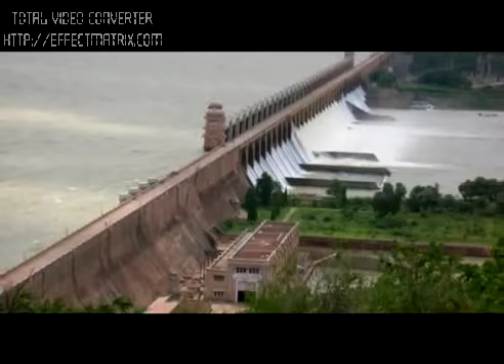Water is a vital element that sustains life on this planet Earth. Our ancestors developed reservoirs to store vast amounts of water to support civilization. The structures erected for the purpose are called dams. Over the years, the size and shapes of dams have undergone tremendous dimensions, and their purpose diversified significantly, so as to include power generation. But are we asking too much of nature, and making the most beneficial discovery of all times, the most potent water bombs?

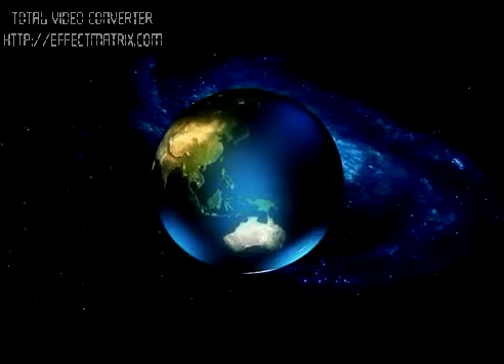The mighty Western Ghats guarding Kerala, the southernmost state of the Indian peninsula. It is the womb of 44 rivers, including Periyar, the longest river of Kerala. It is across this river, the over 100-years-old ailing Mullaperiyar Dam is haplessly awaiting its inevitable destiny. An imminent deluge which may spell the doom of an estimated 2.5 million inhabitants downstream.

And what is more alarming is that its days are numbered, and the nightmare may turn to a reality at any time. Not only the local population downstream, but a host of cities and townships, along with all their progress, are in peril in the event the inevitable happens.

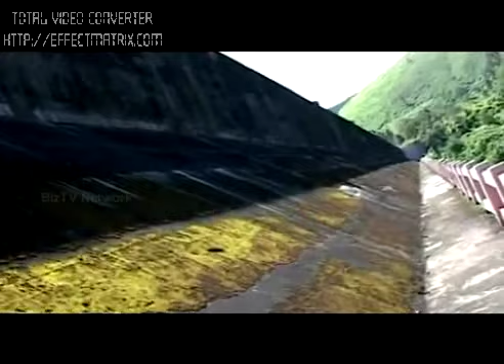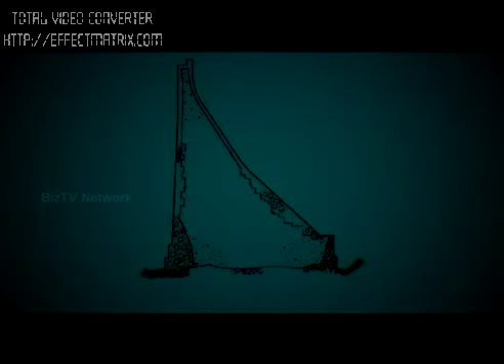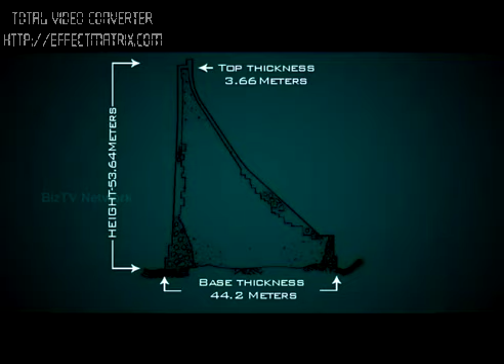The story of Mullaperiyar Dam dates back to 1895, when it was constructed across the river Periyar in crude lime surki mortar, at a time when dam engineering was in its infancy. The main dam has a length of 366 meters and a top width of 3.66 meters, base thickness of 44.2 meters. The height of the dam from the deepest foundation is 53.64 meters. The gross capacity of the reservoir is 15.662 TMC.

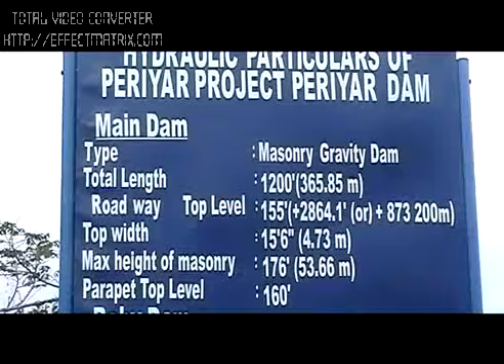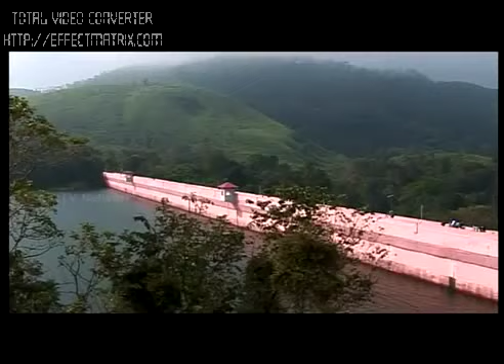The 244-kilometer-long Periyar is abundant with 435 TMC of fresh water per year. It originates from Shivagiri in the Western Ghats at an elevation of 2,400 meters from sea level, and joins the Mullayar downstream at an elevation of 850 meters. It is at this elevated juncture the Mullaperiyar Dam has been built for the noble cause of catering to the irrigational needs of the neighboring state of Tamil Nadu under a

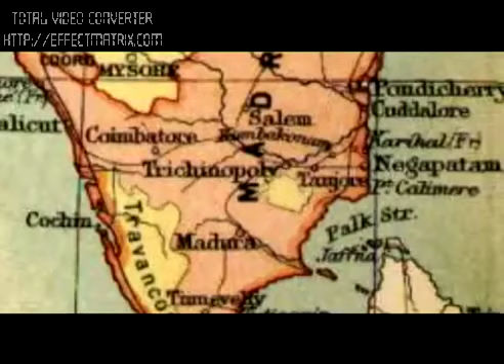999-year lease agreement. It may be noted that the agreement was entered into by the then Maharaja of erstwhile Travancore, His Highness Sri Vishakam Thirunal, with the then Madras government as much as 61 years before India got independence from the British, and that too for 999 years, a duration unheard of in history and unfair by any standards. In fact, it was a benevolent agreement between the two states.

The agro producers from the land irrigated by this water have been serving the food needs of Kerala in a significant manner for years. A carelessly entered subsequent agreement by the two states allowed Tamil Nadu to generate electricity using the waters of Mullaperiyar. However, the fact is that the total economic advantage for Tamil Nadu is stated to be as much as rupees 7,250 million from agriculture and power generation per year, as compared to the meager annual income of rupees 1.03 million for Kerala by way of lease rent and fee, while risking the lives of 2.5 million people.

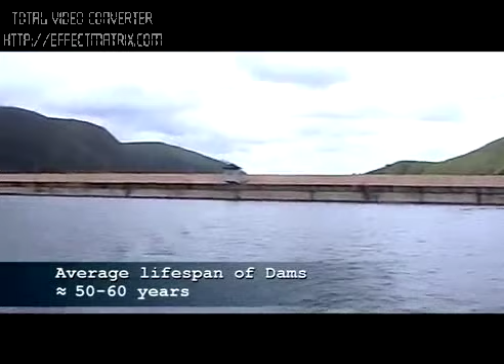Greed is just human. But what happened in the case of this dam is that it was stretched beyond limits, and no one is bothered about the fact that the dam was aging and weakening with the passage of time. So far, so good. But it's like milking a cow beyond its age and productivity. The structural weakness of this dam, which has outlived its lifespan by several years, was evident from its very inception. Even the British engineer Pennycuick, who designed the Mullaperiyar Dam, had not guaranteed more than 50 years lifespan for it.

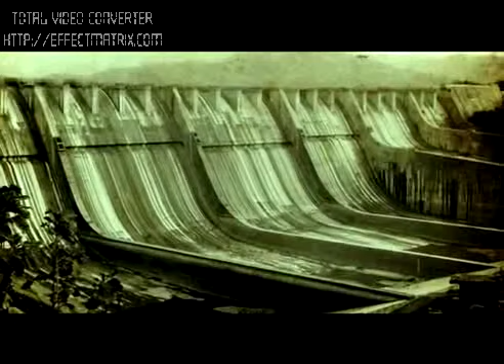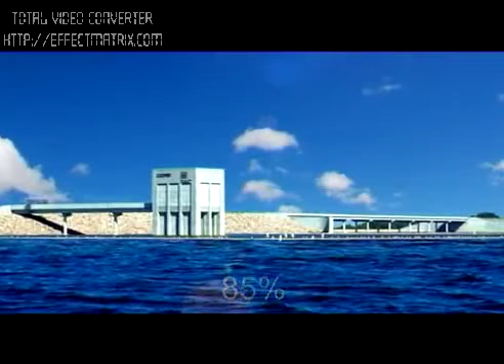It is true that there are more than 120 large dams that exist in India today, which are more than 100 years old. But the grim reality is that all these dams which have outlived their lifespan are equally prone to failures at any time, according to the experts. It is estimated that 85% of all large dams, numbering about 40,000 all over the world, would have passed their projected lifespans by 2020, with the majority in the US and China.

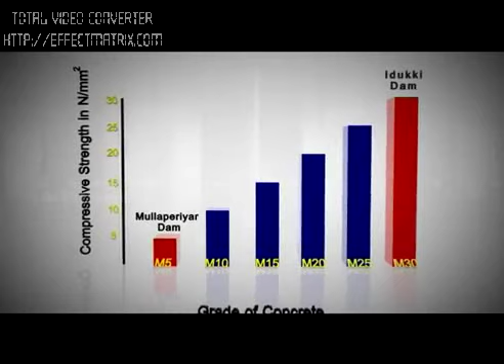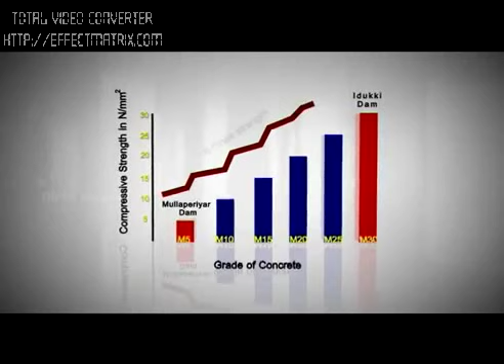And here is a dam which is 100 years old, leaking from head to tail. Lime surki concrete, a very inferior concrete, constitutes almost 2/3 of the dam's core. This concrete, categorized as M5, is much lower in strength compared to M30, being used for major dam constructions, like that of the Idukki Arch Dam downstream of Mullaperiyar. M30 concrete has almost 6 times the strength of lime surki concrete used in Mullaperiyar Dam.

Over the years, the strength of the surki concrete has further come down due to the continuous leaching of lime from the dam's core. The deteriorated downstream condition of the dam was exposed when the water level went to 109 feet. No repairs can be done below this level, since there has always been water below this level since 1895. Even though 2 attempts of grouting were made in the 1930s and 1960s, they were not able to completely fill the cavities formed due to the leaching of lime. Cosmetic patchworks being done on the body of this ailing dam would not make it safer or stronger, because the ailments of this old dam are inherent and deep-rooted.

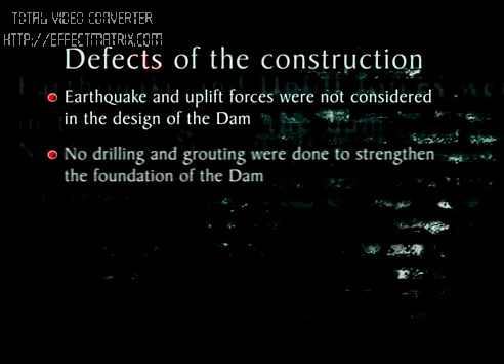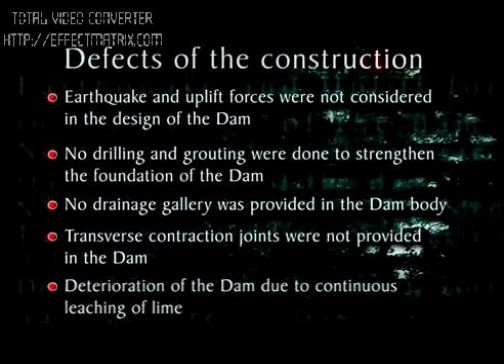Some specific defects of the construction include: earthquake and uplift forces were not considered in the design of the dam. No drilling and grouting were done to strengthen the foundation of the dam. No drainage gallery was provided in the dam body. Transverse contraction joints were not provided in the dam. Deterioration of the dam due to continuous leaching of lime. What makes the case of the Mullaperiyar Dam more startling is the fact that it is situated in an active fault zone, which makes it more vulnerable to failure in the event of an earthquake of moderate intensity.

The dispute has been going on for quite a long time, but unfortunately the authorities are not thinking about the fate of poor people in 4 districts. Let's say if something happens to the dam, some earthquake or something like that, they will simply be washed away.

Within a span of 2 days, 2 tremors of mild intensity occurred on 5/11/2010, M2.0, and 6/11/2010, M2.9, in the 50-kilometer range of Mullaperiyar Dam, causing panic. Even though these earthquakes are minor in nature, they need to be viewed as an indication of the increased seismicity of the region surrounding Mullaperiyar Dam.

Kerala is a state blessed with pristine rivers in plenty. Landslides and floods have been quite prominent in multiple parts of the state. A heavy landslide is more than enough to cause high tidal waves that can easily disintegrate the entire dam. Torrential rain due to global warming is another threat initiated by humans. Torrential rains and floods are the ones that can break any dam, and global warming has of late increased the incidence of untimely rains and floods.